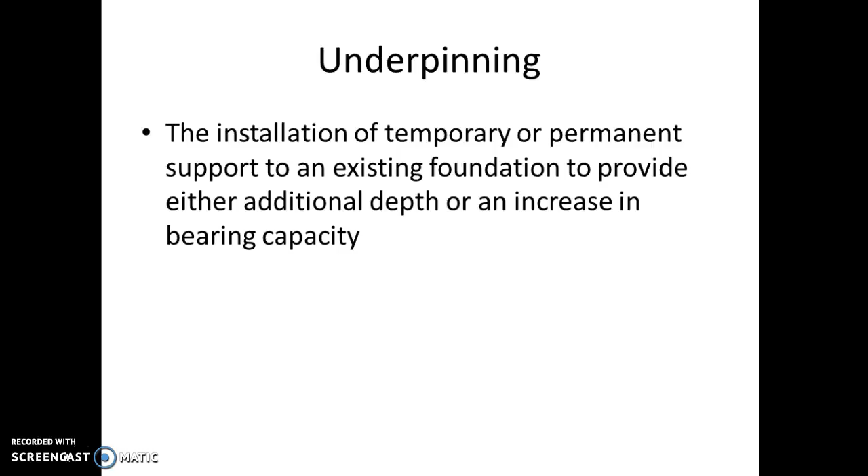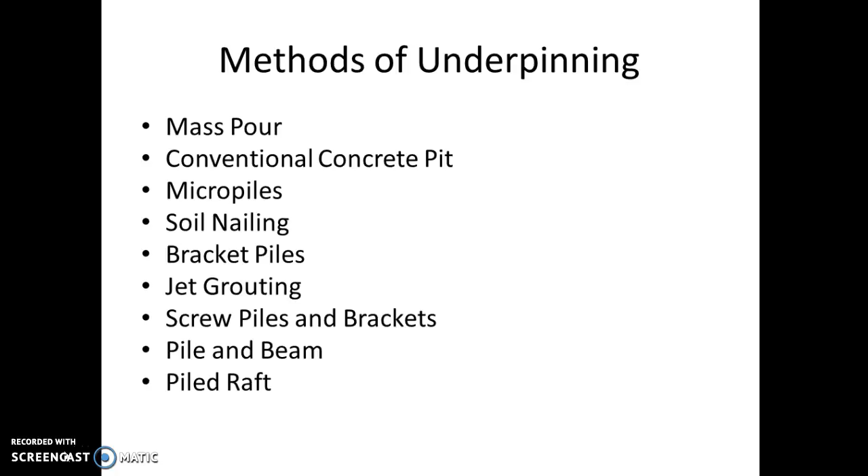These are some of the methods of underpinning: mass pour, conventional concrete pit, micro piles, soil nailing, bracket piles, jet grouting, screw piles and brackets, pile and beam, and piled raft.

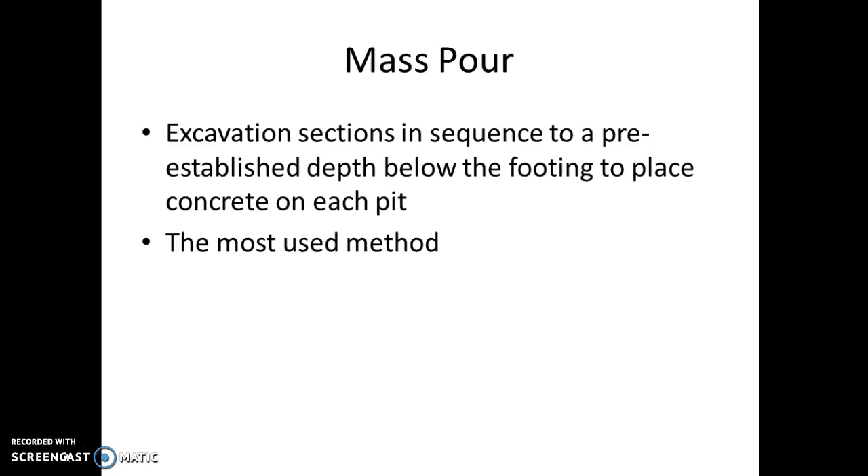Mass pour is one of the most used methods, excavating sections in sequence to a pre-established depth below the footing and placing the concrete into each pit.

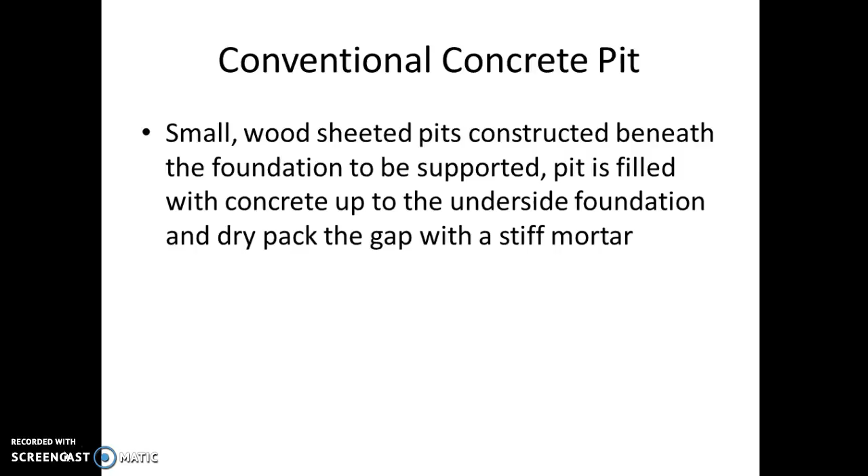Conventional concrete pit is where you place small wood sheeted pits constructed beneath the foundation to be supported, then fill the pit below with concrete up to the underside of the foundation, and later dry pack the gap with a stiff mortar. Micro piles are installed adjacent to the structure to be supported.

An earth retention technique for soil nailing is used to support retaining walls, stabilizing slopes, or excavation support.

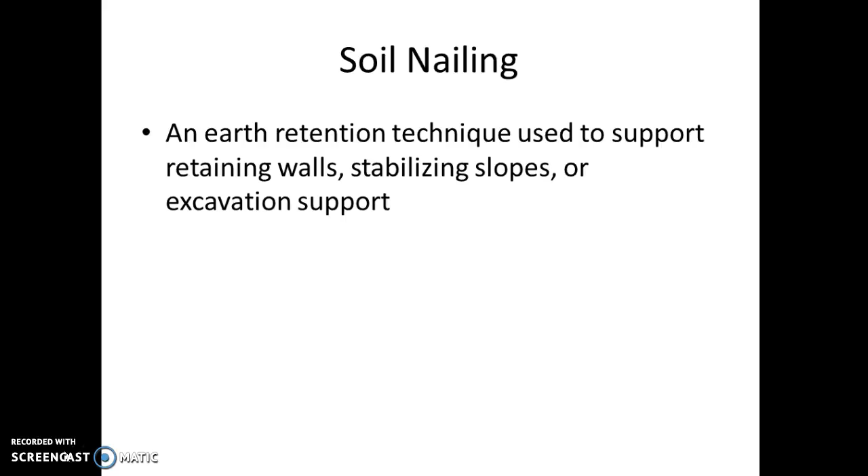Bracket piles are used in conjunction with earth retention work to support and/or stabilize existing foundations adjacent to a proposed excavation. The piles are installed in pre-drilled holes alongside the exposed wall or column footing. A bracket is mounted to the underside of the footing and attached perpendicular to the new pile to transfer the load below the excavation subgrade.

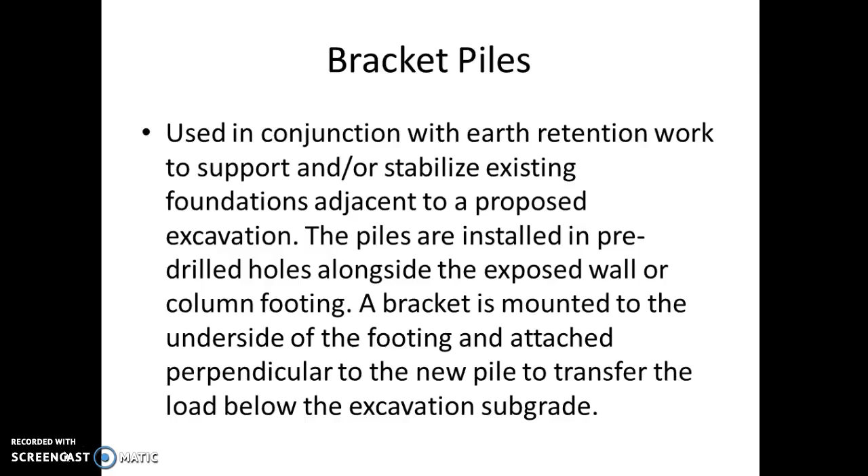Screw piles and brackets are used in instances where traditional underpinning is not possible. They can be used when excavation is needed at a great depth where a piling rig is just not able to get there and smaller equipment is needed. Screw piles and brackets can be installed by two men by hand. The advantages to these are little noise, minimal vibration, and a speedy installation.

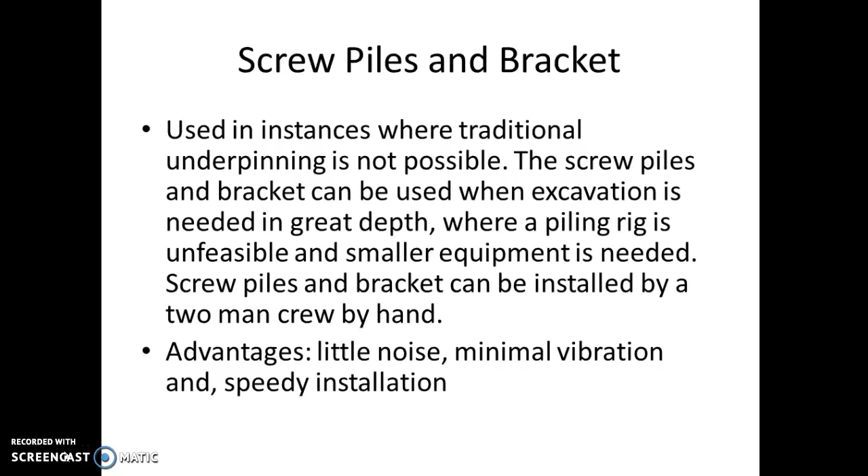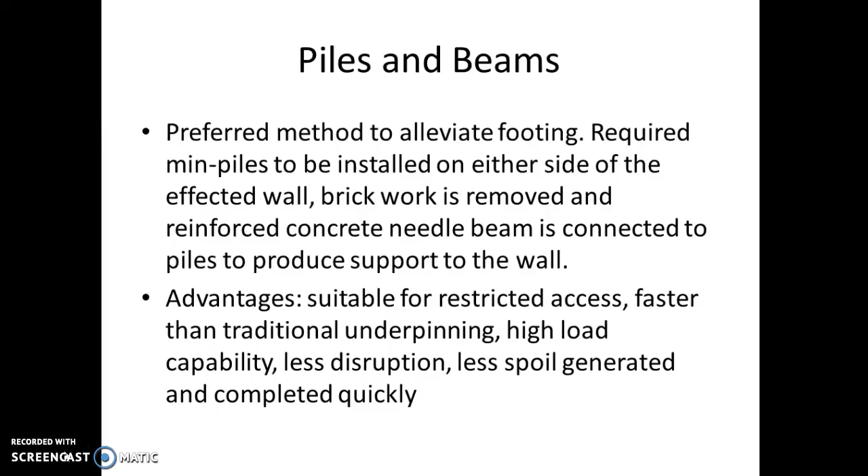Piles and beams are a preferred method to alleviate the footing. They require mini piles to be installed on either side of the affected wall, where the brickwork is then removed and reinforced concrete needle beams are connected to the piles to produce the support of that wall. The advantages to this are it's suitable for restricted access, faster than traditional underpinning, high load capability, less disruption, less spoil generated, and can be completed quickly.

Piled raft is used when the entire structure is going to need underpinning. This is when the foundations are too deep for other methods and when the soils are too hard for small equipment that can't excavate to the required depth.

Piles are placed in locations, pockets below footings are broken and replaced with reinforced needle beams to support the wall load. A ring beam is built to link these needles. The concrete is poured to form the underneath of the structure.

Advantages to this are they provide lateral and transverse ties throughout the structure, economical at depths greater than 1.5 meters, and you don't need external access to the building, and it reduces disruption of drainage systems.

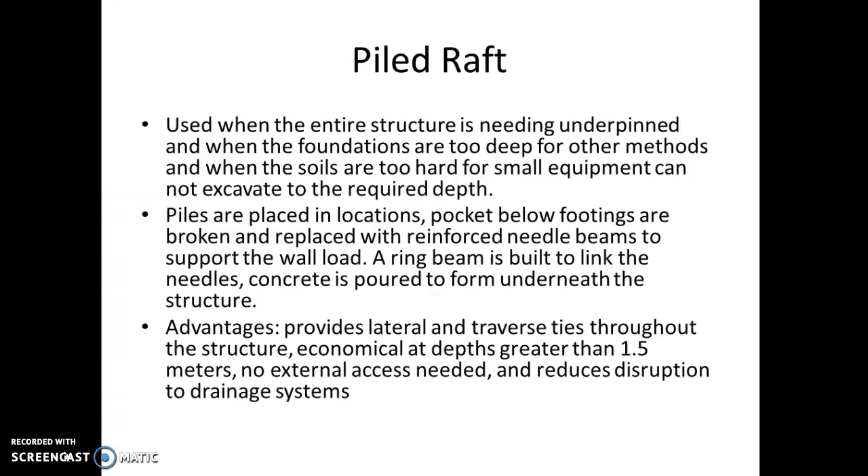The history I found about underpinning is that the definition actually originated in the late 15th century, where they used it for a system of support beneath the wall or the like, the action of supporting and strengthening from beneath, which was a figurative sense of prop and support that was recorded back in 1580.

The subject of underpinning the foundations of buildings is an old and vast one. John Addison reported, in his writings On the Art of Building, that Leon Battista Alberti was one of the first people to recognize underpinning. He was an Italian architect from the mid 1400s to the late 1400s before his death.

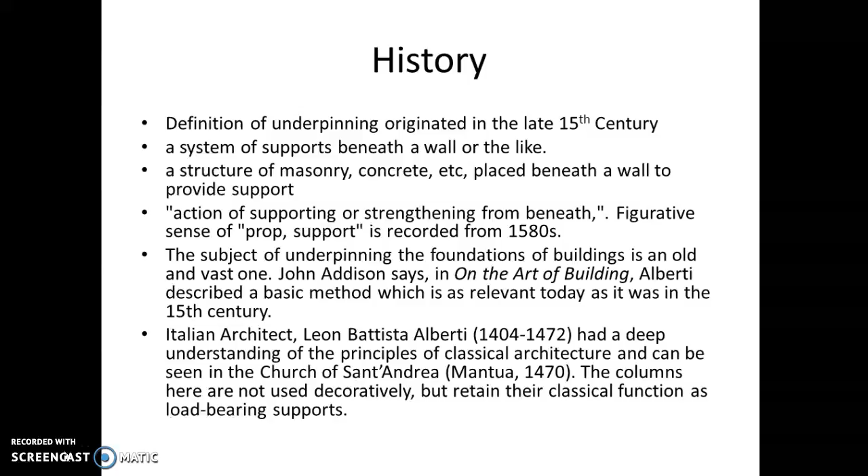His classic architecture can be seen in the church listed here, and the columns there weren't just used to be decorative, but they were actually functional and load-bearing.

Underpinning is worldwide. This has been documented in Nigeria, San Francisco, New York, Malaysia, Australia, and England, and many other places around the world.

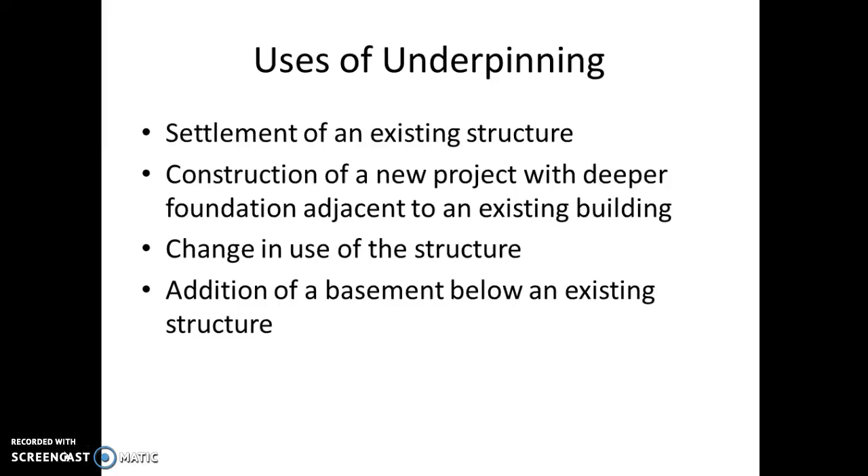Uses of underpinning include settlement of an existing structure, construction of a new project with deeper foundations adjacent to an existing building, changes in the use of the structure, and addition of a basement below the existing structure.

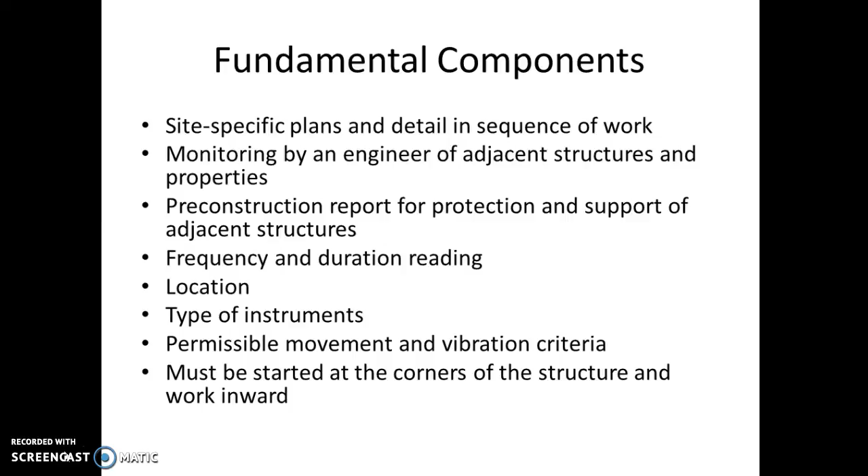The fundamental components of underpinning are site-specific plans and details and sequence of work, monitoring by an engineer of adjacent structures and properties, pre-construction reports for protection and support of adjacent structures, frequency and duration readings, location, types of instrument, permissible movement and vibration criteria, and work must start from the corners and proceed toward the inside of the building.

Underpinning shall be designed as a permanent structural element. It shall be designed and installed in a manner that limits lateral and vertical displacement of adjacent structures, and it shall take into account the effects on foundation and structure produced by the lateral earth pressure being exerted.

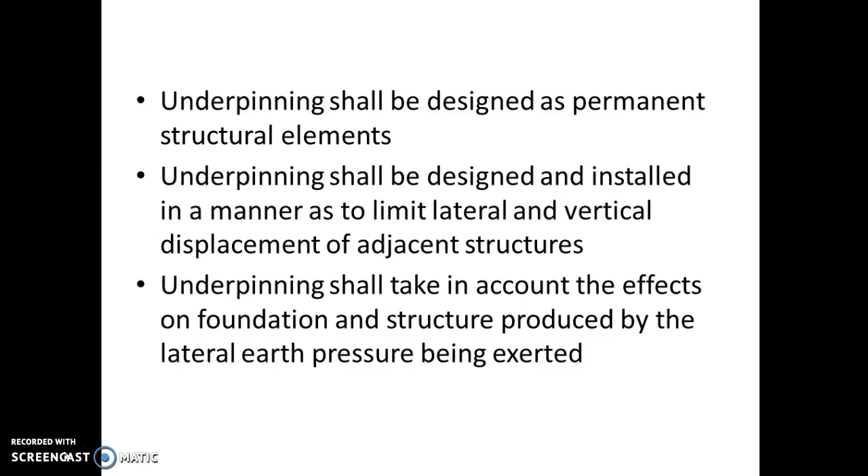These are some case studies I found about underpinning. There were three cases, all different. The first: weather was the cause of destruction of a 4-story building adjacent to a high-rise complex that was being renovated. They had done everything right, but due to the water and the old foundation of the existing building, the building settled and developed cracks in the walls.

Another case was improper underpinning and excessive excavation. An example of this was in the 1980s, where it caused the destruction of 3 old buildings in Lexington, Kentucky. The excessive excavation undermined the footing, causing the 3 older buildings to collapse. The contractor was required to rebuild those buildings, but there weren't any injuries reported.

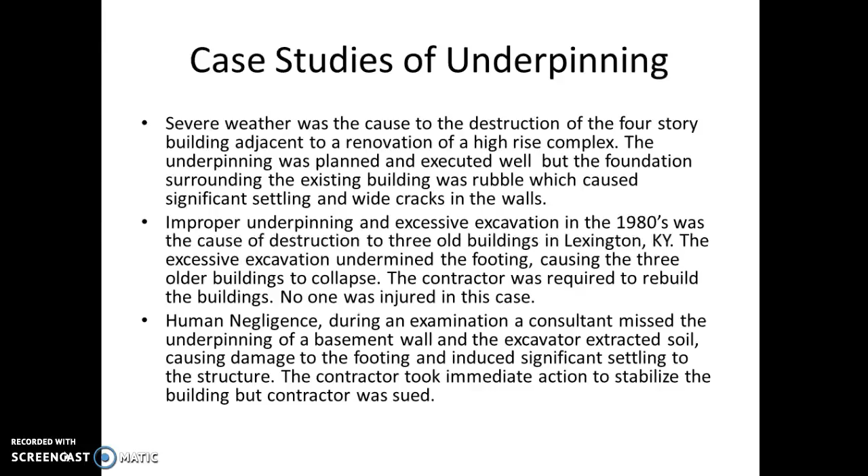Another case was human negligence. During an examination, a consultant missed an underpinning in a basement wall, and the excavator extracted the soil around it, causing damage to the footing and producing a lot of settling in the structure. Even though the contractor took immediate action and stabilized the building, the contractor was sued.

Temporary structure failures: most often the failures in underpinning cause structural damage to adjacent buildings, injury, loss of life, extensive property damage, construction delays, and expensive litigation.

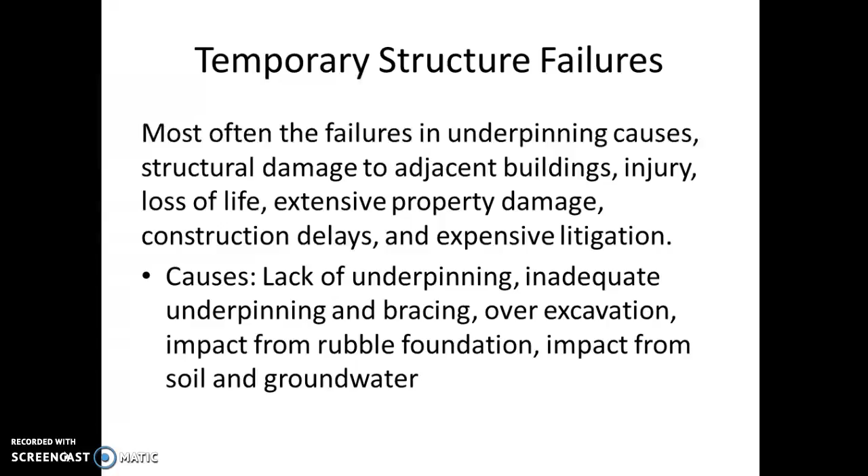The causes of these are lack of underpinning, inadequate underpinning and bracing, over-excavation, impact from rubble foundation, and impact from soil and groundwater.

OSHA doesn't have exact regulations on underpinning, but there are a few mentions of underpinning foundations. Only some local states hold regulations about underpinning for foundations, like New York City, which requires controlled inspections of the underpinning of foundations, but no other specific specifications are provided.

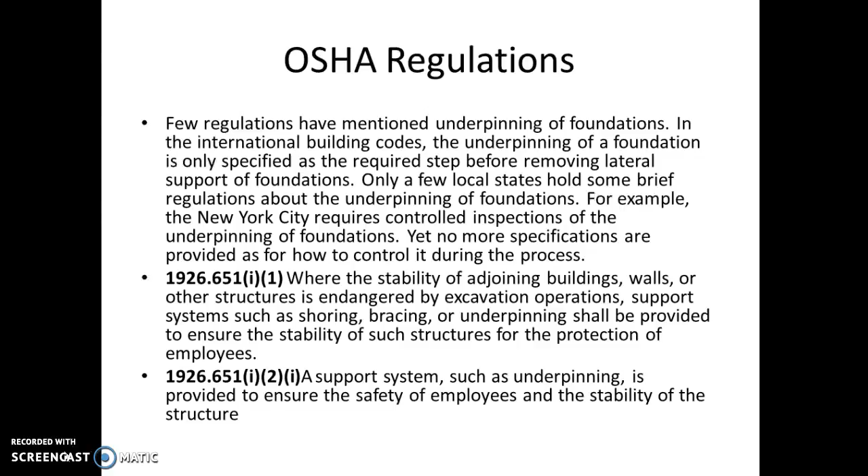I did find in OSHA construction regulations that where the stability of adjoining buildings, walls, or other structures is endangered by excavation operations, support systems such as shoring, bracing, or underpinning shall be provided to ensure the stability of such structures for protection of employees. Another section states that a support system such as underpinning is provided to ensure the safety of employees and the stability of structure, which really says the same thing as above.

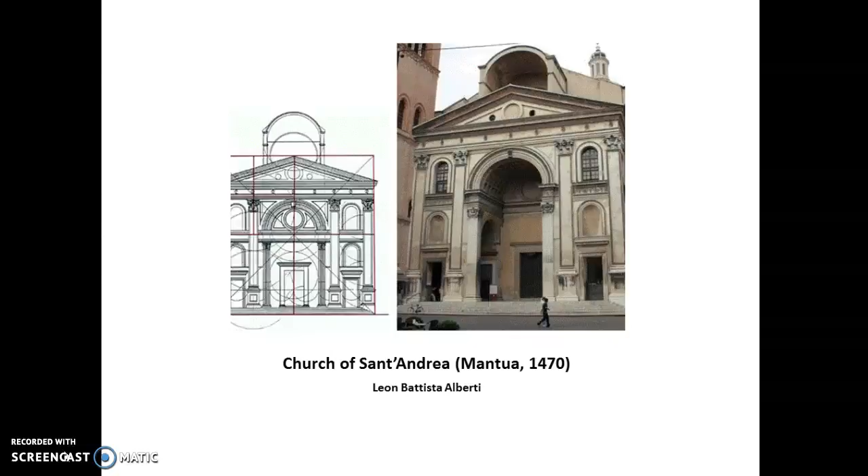This is the church that was designed and built by Leon Battista Alberti. He liked geometric shapes and understood them very well.

This is a picture of the California Palace of the Legion of Honor in San Francisco, where 46 of the columns were supporting a load of over 250,000 pounds, so they could put in new service and ventilation tunnels underneath the existing structure.

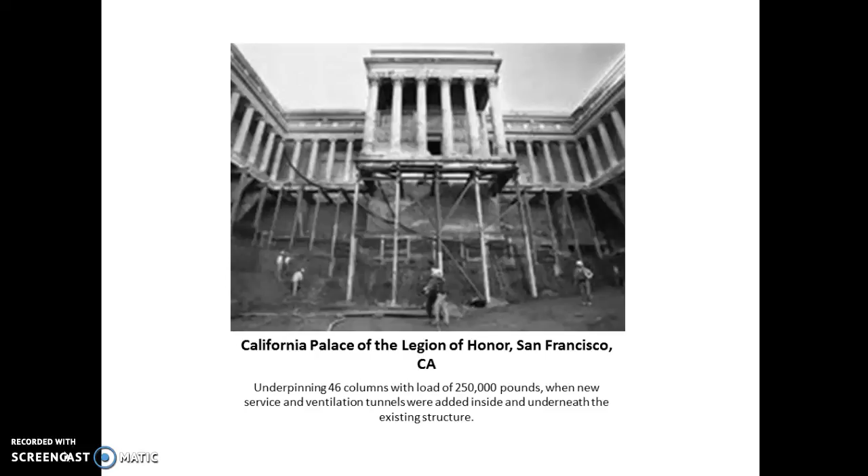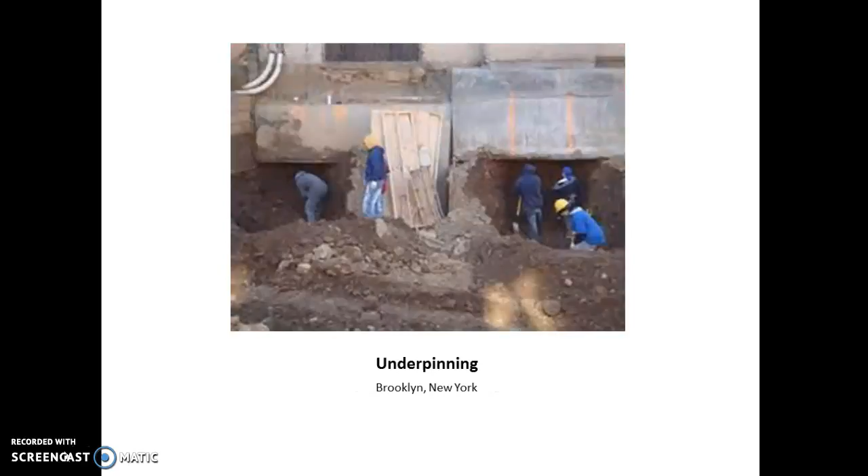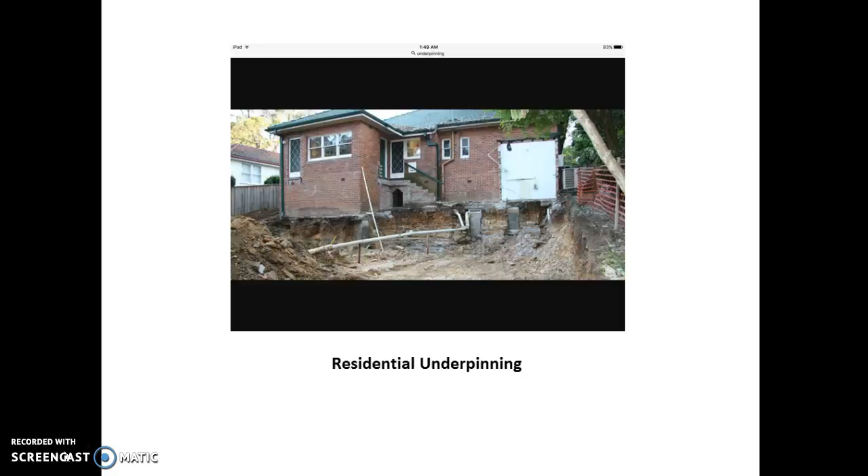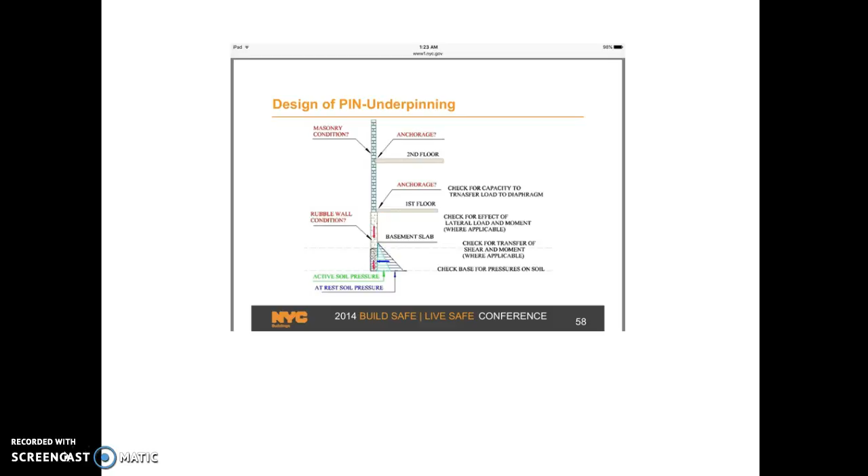This is an example of underpinning that I could find, where the rubble wall condition is questionable and they need to put pinning in so the soil does not compress so much. Here's another example of underpinning.